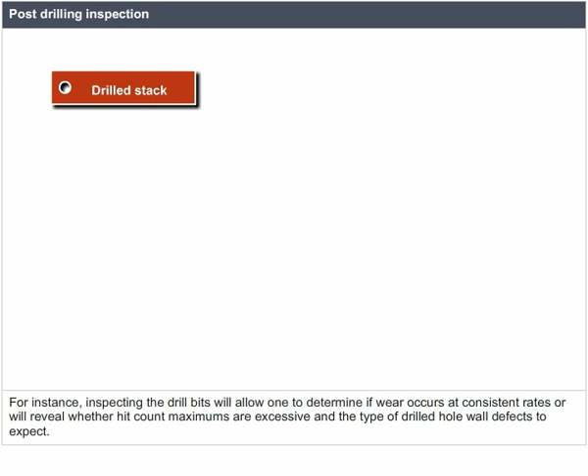Post-drilling inspection. A wealth of information is available by simply examining the materials from the drilled stack and the drill bits. For instance, inspecting the drill bits allows one to determine if wear occurs at consistent rates, or reveal whether hit count maximums are excessive, and the type of drill hole wall defects to expect.

Bonded debris and/or extensive wear to the drill corners imply high drilling temperatures or materials that are not fully cured, and point to a problem with the materials, or may suggest an excessive surface speed.

Extensive primary cutting edge wear indicates abrasive materials and may require lowering stack heights, reducing hit counts, or replacing entry or backup materials.

Post-drilling inspection continued. Burrs on the surfaces within the stack mean that there is a problem with the way panels are assembled and pinned, or it may be the result of warped panels.

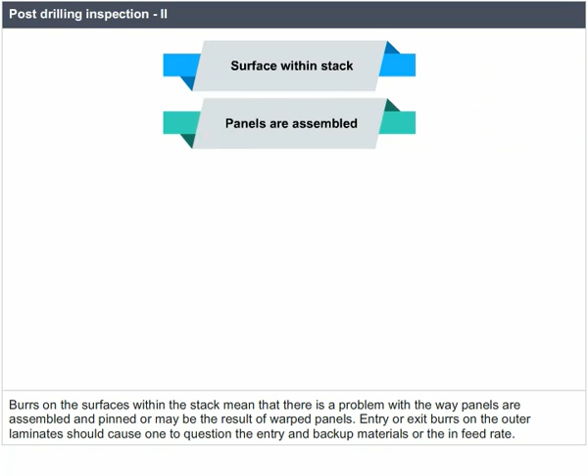Entry or exit burrs on the outer laminates should cause one to question the entry or backup materials or the in-feed rate. The point of the post-drilling inspection process is that if one takes time on a regular basis to examine materials and drill bits after drilling, many drilling problems would be solved before they get out of hand.

Soldering. Soldering is a process in which two or more metal items are joined together by melting and flowing a filler metal, solder, into the joint. The filler metals have a lower melting point than the adjoining metal.

Soldering differs from welding in that soldering does not involve melting the workpieces. In brazing, the filler metal melts at a higher temperature, but the workpiece metal does not melt. In the past, nearly all solders contained lead, but environmental concerns have increasingly dictated use of lead-free alloys for electronics and plumbing purposes.

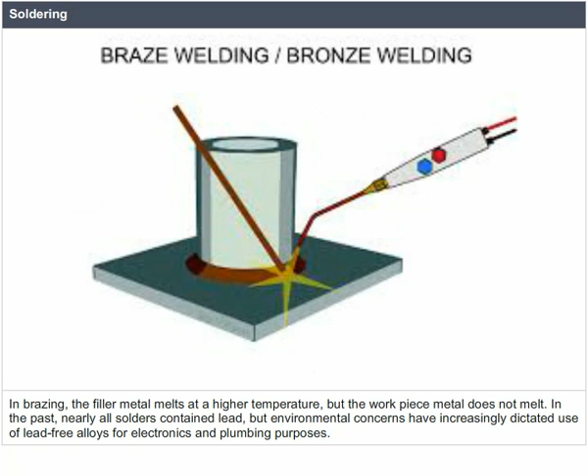Applications. Soldering is used in plumbing, electronics, and metalworking, from flashing to jewelry. Soldering provides reasonably permanent but reversible connections between copper pipes in plumbing systems, as well as joints in sheet metal objects such as food cans, roof flashing, rain gutters, and automobile radiators.

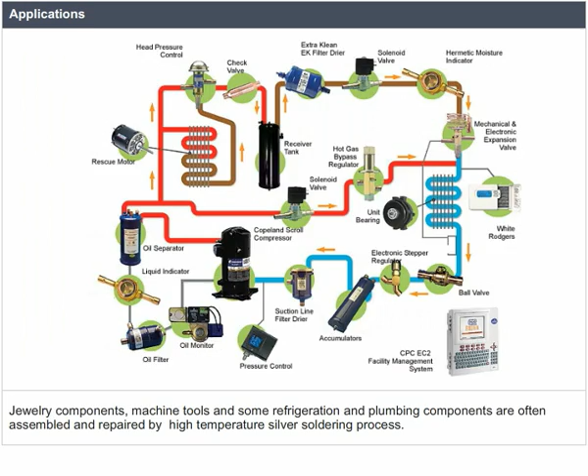Jewelry components, machine tools, and some refrigeration and plumbing components are often assembled and repaired by the high-temperature silver soldering process. Small mechanical parts are often soldered or brazed as well. Soldering is also used to join lead came and copper foil in stained glass work. It can also be used as a semi-permanent patch for a leak in a container or cooking vessel. Electronic soldering connects electrical wiring and electronic components to printed circuit boards, PCBs.

Types of solders. Most of the solder metals are alloys of tin and lead. These alloys exhibit a wide range of melting points, so different types of soldering metal can be used for a variety of applications. The percentage of lead is kept low due to its toxic properties.

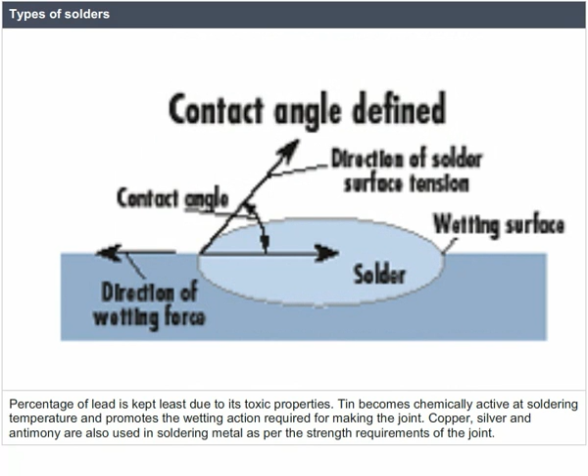Tin becomes chemically active at soldering temperature and promotes a wetting action required for making the joint. Copper, silver, and antimony are also used in soldering metal as per the strength requirements of the joint. Different solder metals have different melting points and varying applications.

Types of solders continued. A solder is selected on the basis of its melting point. If the metals to be joined have a high melting point, solder of high melting point is generally selected, as it provides better strength of the joint.

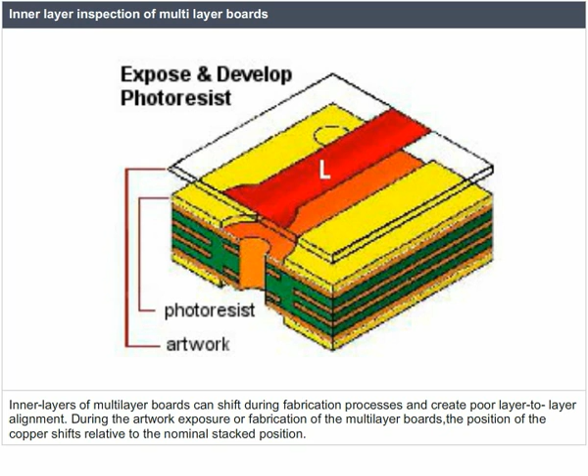Inner layer inspection of multi-layer boards. Inner layers of multi-layer boards can shift during fabrication processes and create poor layer-to-layer alignment. During the artwork exposure or fabrication of the multi-layer boards, the position of the copper shifts relative to the nominal stacked position.

This can create breakout or missing of the copper pads when drilling the interconnection holes. Two methods of inspecting the inner layers of multi-layer panels exist. One that has been used for several years is X-ray. This technology has progressed significantly and is widely used.

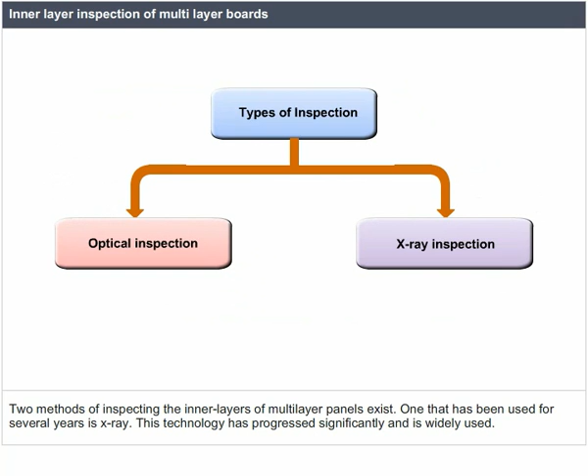X-ray technology is used to inspect the inner layers of multi-layer PCBs and to verify that the drill pads are located properly. Inner layer shift is identified easily in an X-ray image, and a simple technique can be used to measure the misalignment accurately.

In developing the PCB artwork, a set of stacked pads are located in the coupon area. These are inspected and a best fit centering is calculated.

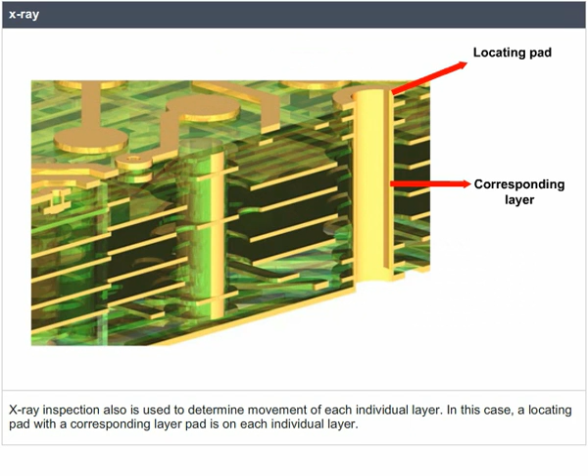X-ray inspection is also used to determine movement of each individual layer. In this case, a locating pad with a corresponding layer pad is on each individual layer. The system can measure the distance from the locating pad to a layer pad and determine the movement of each layer due to the location of the layer pads.

PCBs can be inspected after tooling holes are drilled to verify that they are in the proper locations. In addition, X-ray inspection can be performed after final drilling to verify that the holes are centered within the pads.

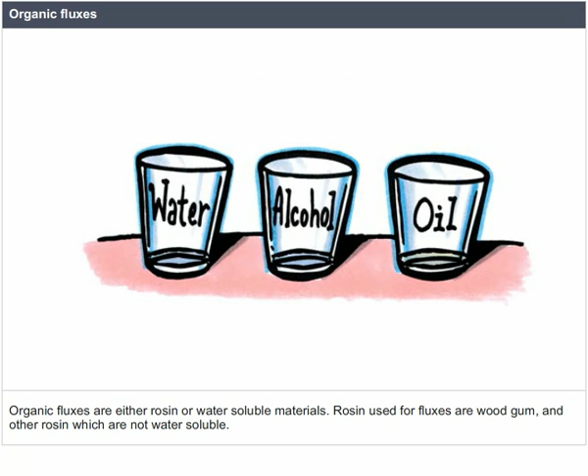Types of soldering fluxes. Soldering fluxes can be classified as organic and inorganic fluxes. Organic fluxes. Organic fluxes are either rosin or water-soluble materials. Rosin used for fluxes are wood gum and other rosin which are not water-soluble. Organic fluxes are mostly used for electrical and electronic circuit making. These are chemically unstable at elevated temperature but non-corrosive at room temperature.

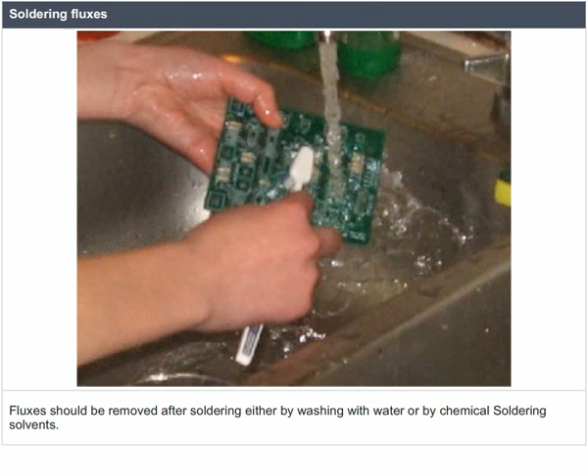Inorganic fluxes. Inorganic fluxes consist of inorganic acids, mixture of metal chlorides. These are used to achieve rapid and active fluxing where formation of oxide films is a problem. Soldering fluxes. Fluxes should be removed after soldering either by washing with water or by chemical soldering solvents.

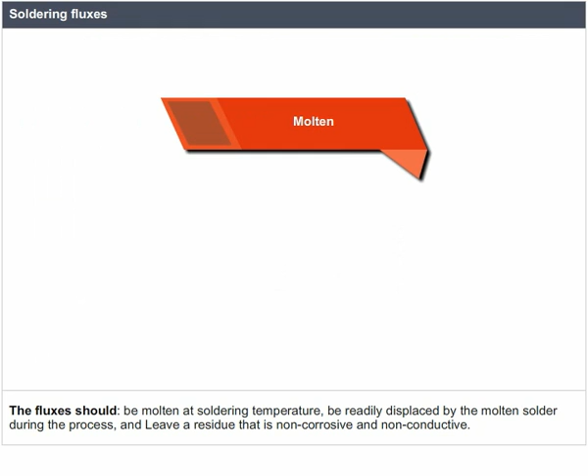The main functions performed by fluxes are remove oxide films and tarnish from base part surfaces, prevent oxidation during heating, and promote wetting of the faying surfaces. The fluxes should be molten at soldering temperature, be readily displaced by the molten solder during the process, and leave a residue that is non-corrosive and non-conductive.

Soldering process. There are three forms of soldering, each requiring progressively higher temperatures and producing an increasingly stronger joint strength. Soft soldering, which originally used a tin lead alloy as a filler metal. Silver soldering, which uses an alloy containing silver. Brazing, which uses brass alloy for the filler. The alloy of the filler metal for each type of soldering can be adjusted to modify the melting temperature of the filler.

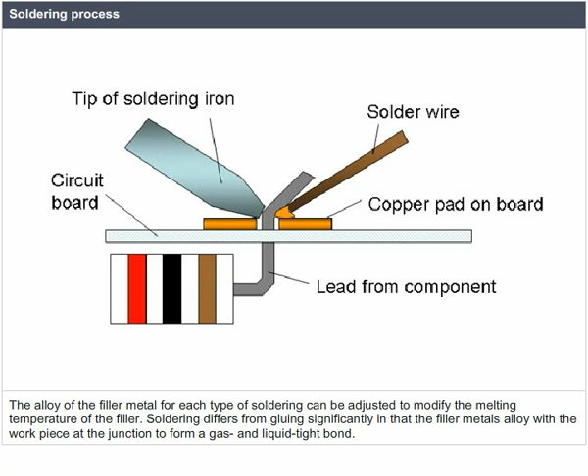Soldering differs from gluing significantly in that the filler metals alloy with the workpiece at the junction to form a gas and liquid tight bond. Soft soldering is characterized by having a melting point of the filler metal below approximately 400 degrees Celsius or 750 degrees Fahrenheit, whereas silver soldering and brazing use higher temperatures, typically requiring a flame or carbon arc torch to achieve the melting of the filler.

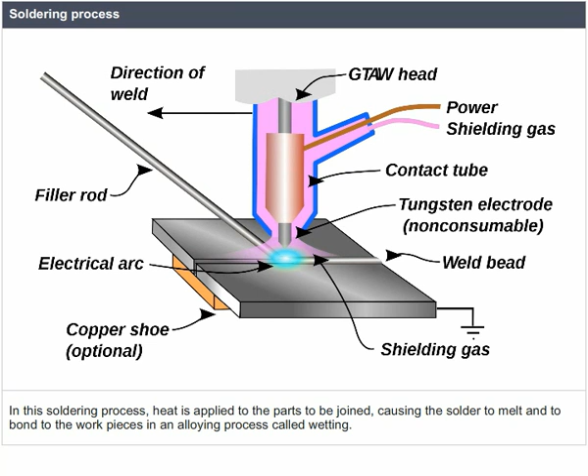Soft solder filler metals are typically alloys that have liquidus temperatures below 350 degrees Celsius. In this soldering process, heat is applied to the parts to be joined, causing the solder to melt and to bond to the workpieces in an alloying process called wetting. In stranded wire, the solder is drawn up into the wire by capillary action in a process called wicking. Capillary action also takes place when the workpieces are very close together or touching.

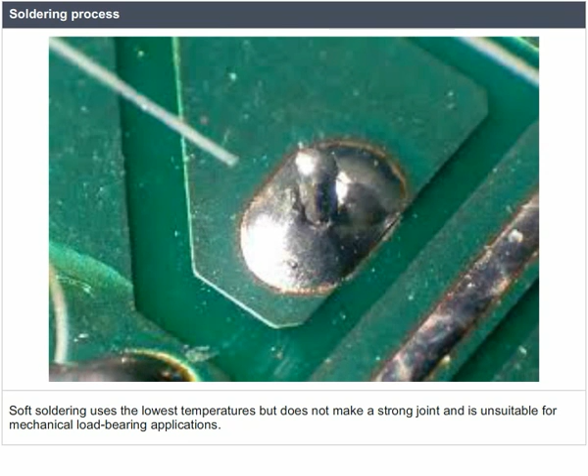The joint's tensile strength is dependent on the filler metal used. Soldering produces electrically conductive, water and gas-tight joints. Each type of solder offers advantages and disadvantages. Soft solder is so called because of the soft lead that is primarily its ingredient. Soft soldering uses the lowest temperatures but does not make a strong joint and is unsuitable for mechanical load-bearing applications. It is also unsuitable for high-temperature applications as it softens and melts.

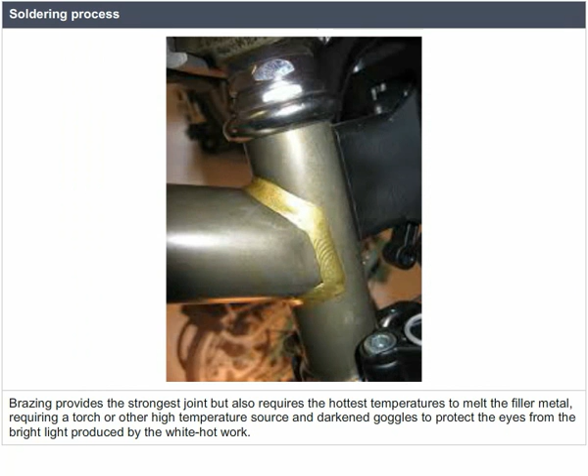Silver soldering, as used by jewelers, machinists, and in some plumbing applications, requires the use of a torch or other high-temperature source and is much stronger than soft soldering. Brazing provides the strongest joint but also requires the hottest temperatures to melt the filler metal, requiring a torch or other high-temperature source and darkened goggles to protect the eyes from the bright light produced by the white-hot work. It is often used to repair cast-iron objects, wrought iron furniture, etc.

Soldering operations can be performed with hand tools, one joint at a time, or on a production line. Hand soldering is typically performed with a soldering iron, soldering gun or a torch, or occasionally a hot air pencil. Sheet metal work was traditionally done with soldering coppers directly heated by a flame, with sufficient stored heat in the mass of the soldering copper to complete a joint. Torches or electrically heated soldering irons are more convenient.

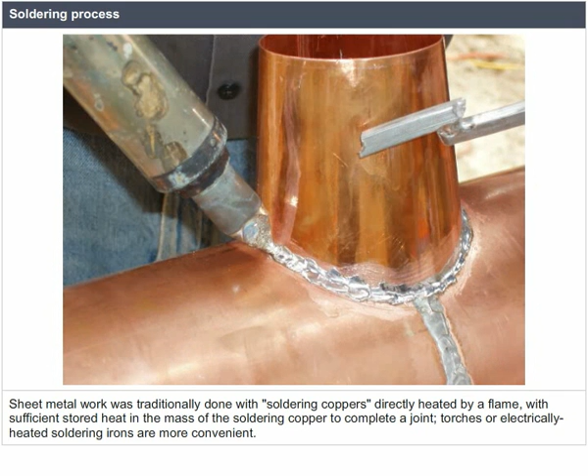All soldered joints require the same elements of cleaning of the metal parts to be joined, fitting up the joint, heating the parts, applying flux, applying the filler, removing heat and holding the assembly still until the filler metal has completely solidified. Depending on the nature of flux material used, cleaning of the joints may be required after they have cooled. Each alloy has characteristics that work best for certain applications, notably strength and conductivity, and each type of solder and alloy has different melting temperatures.

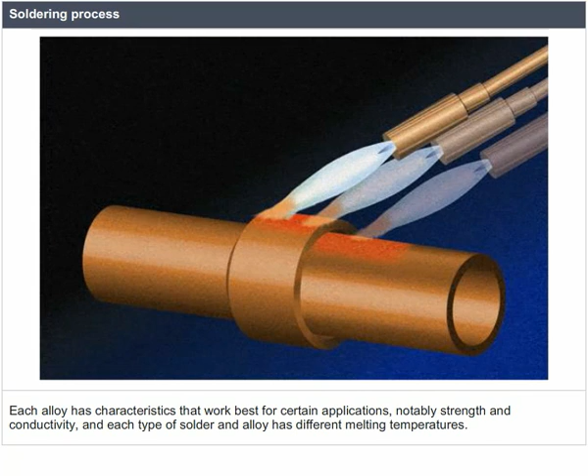The term silver solder likewise denotes the type of solder that is used. Some soft solders are silver-bearing alloys used to solder silver-plated items. Lead-based solders should not be used on precious metals because the lead dissolves the metal and disfigures it.

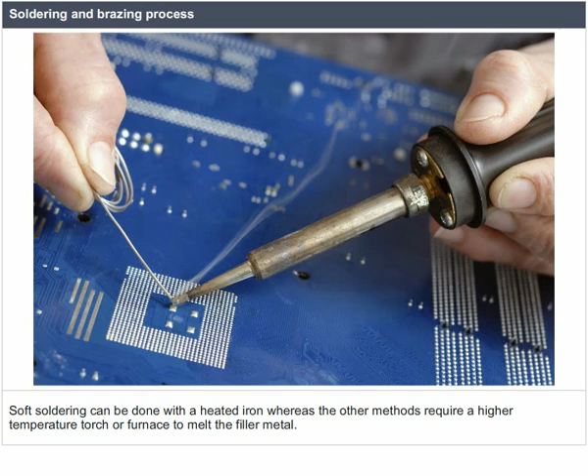Soldering and brazing process. The distinction between soldering and brazing is based on the melting temperature of the filler alloy. A temperature of 450 degrees Celsius is usually used as a practical delineating point between soldering and brazing. Soft soldering can be done with a heated iron, whereas the other methods require a high-temperature torch or furnace to melt the filler metal. Different equipment is usually required since the soldering iron cannot achieve high enough temperatures for hard soldering or brazing.

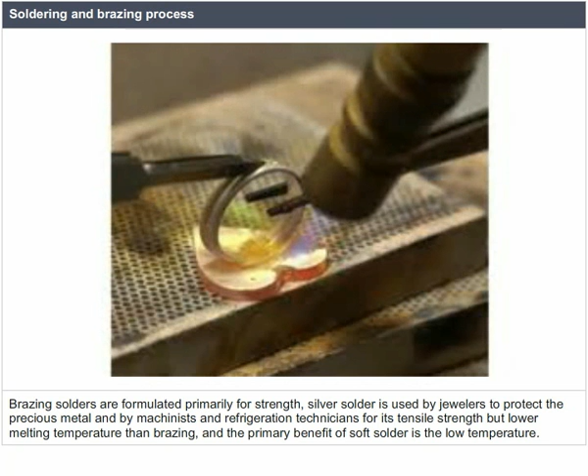Brazing filler metal is stronger than silver solder, which is stronger than lead-based soft solder. Brazing solders are formulated primarily for strength. Silver solder is used by jewelers to protect the precious metal and by machinists and refrigeration technicians for its tensile strength but lower melting temperature than brazing, and the primary benefit of soft solder is a low temperature.

Since the joint is produced using a metal with a lower melting temperature than the workpiece, the joint will weaken as the ambient temperature approaches the melting point of the filler metal. For that reason, the higher temperature processes produce joints which are effective at high temperatures. Braze connections can be as strong or nearly as strong as the parts they connect, even at elevated temperatures.

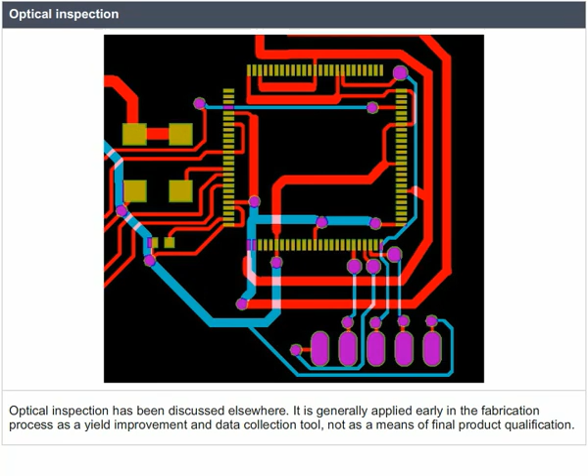Optical inspection. Optical inspection has been discussed elsewhere. It is generally applied early in the fabrication process as a yield improvement and data collection tool, not as a means of final product qualification. However, with improvements in resolution, the type of defects that may escape undetected becomes somewhat more limited, and optical inspection is argued as a possible means of final testing.

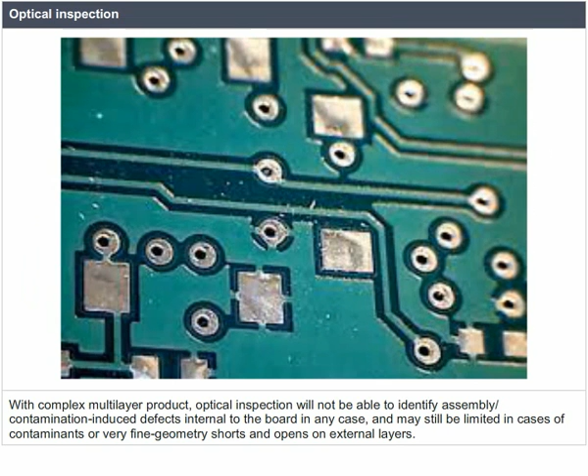With complex multi-layer product, optical inspection will not be able to identify assembly, contamination-induced defects internal to the board in any case, and may still be limited in cases of contaminants or very fine geometry shorts and opens on external layers. The equipment is somewhat slower than universal grid test systems, particularly when run at very high resolution.

For such reasons, it is still not common practice to employ optical inspection by itself as a substitute for electrical testing. This may be a method that develops further in the future or that finds acceptance in special circumstances.

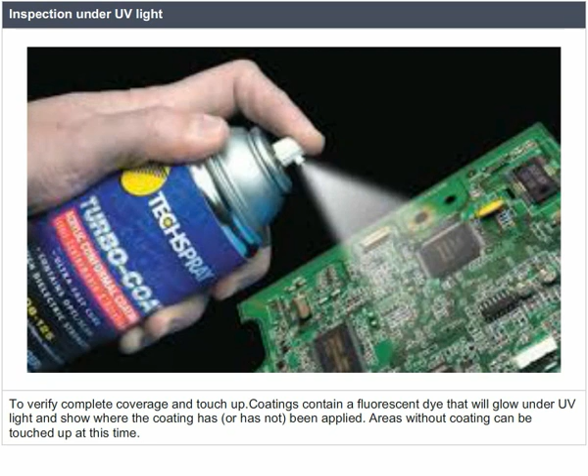Inspection under UV light. To verify complete coverage and touch-up, coatings contain a fluorescent dye that will glow under UV light and show where the coating has or has not been applied. Areas without coating can be touched up at this time. The areas most susceptible to insufficient coating are corners of parts where the coating can flow away and leave little behind, the protruding ends of through-hole part leads, and the shadowed areas under or behind larger components.

If large flat areas are uncoated and show beads of coating, there is a wetting problem due to improper surface preparation or a material incompatibility. Inspection under UV light continued. The coating should also be inspected for improper thickness, bubbles, trapped material, or debris, and incomplete curing.

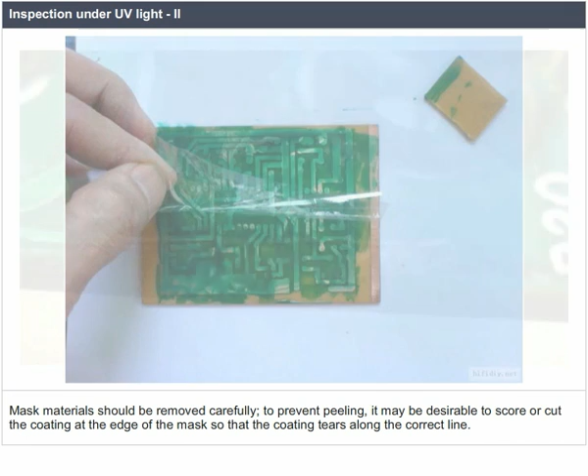Mask material should be removed carefully. To prevent peeling, it may be desirable to score or cut the coating at the edge of the mask so that the coating tears along the correct line. Ensure that the mask is removed entirely and that no residue has been left behind on the board. Latex mask that has been overheated will be sticky and difficult to remove completely, as will overheated masking tapes.

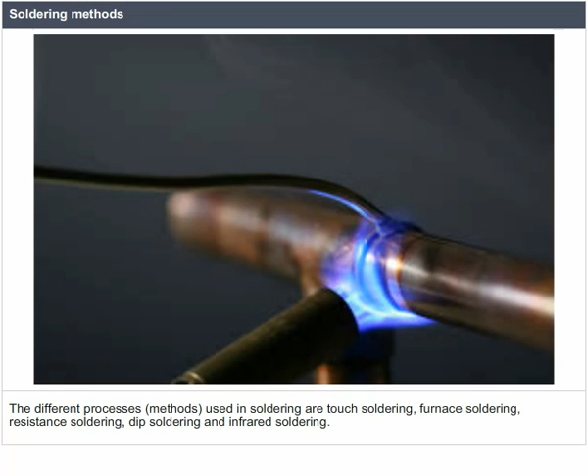Soldering methods. There is a lot of similarity between soldering processes. The different processes or methods used in soldering are touch soldering, furnace soldering, resistance soldering, dip soldering, and infrared soldering. These may apply to hand soldering, wave soldering, and reflow soldering. Hand soldering. Hand soldering is done manually using a soldering iron. Small joints are made this way in a very short duration of approximately 1 second.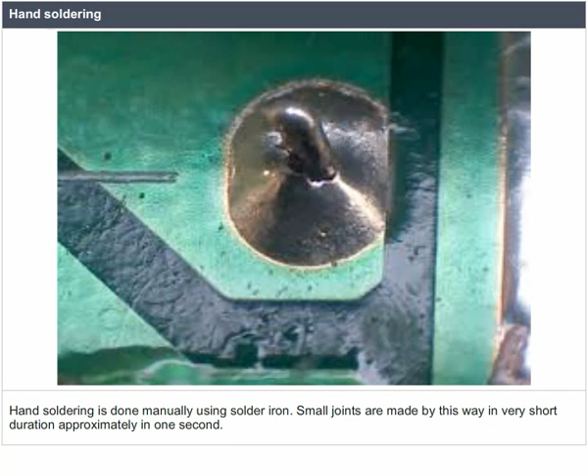Wave soldering. Wave soldering is a mechanized technique that allows multiple lead wires to be soldered to a printed circuit board as it passes over a wave of molten solder. In this process, a PCB on which electronic components have been placed with their lead wires extending through the holes in the board is loaded onto a conveyor for transport through the wave soldering equipment. The conveyor supports a PCB on its sides, so its underside is exposed to the processing steps, which consist of the following.

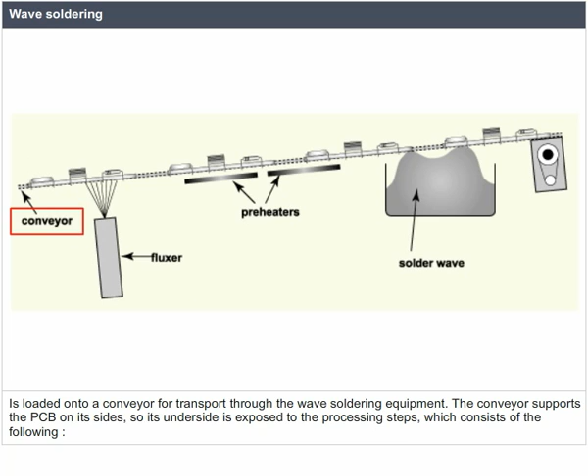Flux is applied through foaming, spraying, or brushing, and wave soldering is used to pump liquid solder from a molten bath onto the bottom of the board to make soldering connections between lead wire and metal circuit on the board. Reflow soldering. This process is also widely used in electronics to assemble surface mount components to printed circuit boards.

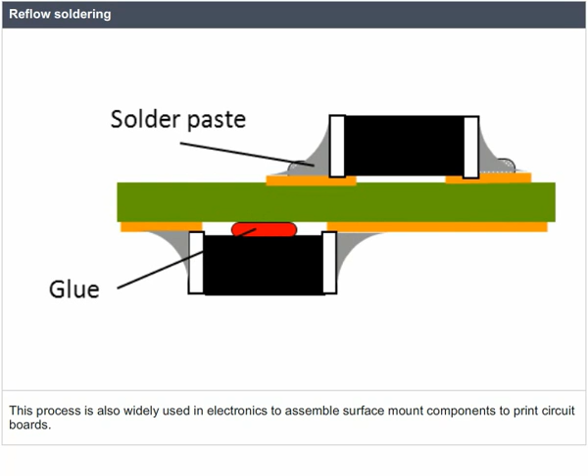In this process, a solder paste consisting of solder powders in a flux binder is applied to spots on the board where electrical contacts are to be made between surface mount components and the copper circuit. The components are placed on the paste spots and the board is heated to melt the solder, forming mechanical and electrical bonds between the component leads and the copper on the circuit boards.

Inspection and testing. There are various types: connector inspection, PCA inspection, solder sliver inspection, electrical testing, and tool check. Connector inspection. Check the connector after pressing for even bottom side pin protrusion, top side connector body seating height, damage to the connector body, inaccurate mating pin positions within the connector as opposed to within the board, damage or movement of electrical shields if the connector is so equipped.

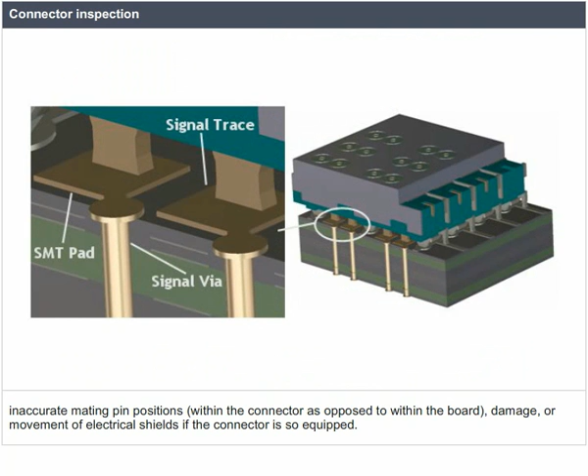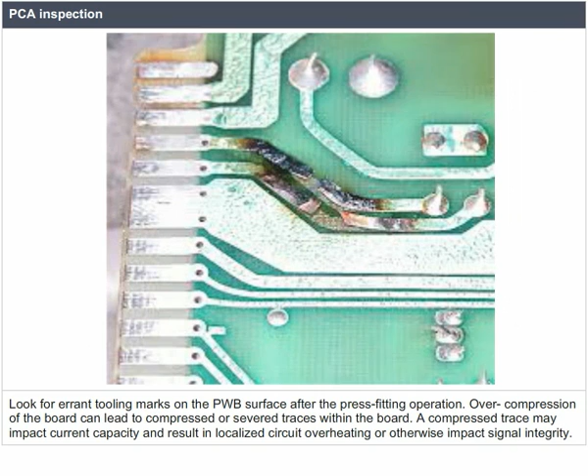PCA inspection. Check the PCA for surface damage in the area of the pressing operation. A mispositioned or damaged press tool or board support can damage components or overly compress the laminate, causing outer or inner layer trace damage. Look for errant tooling marks on the PWB surface after the press fitting operation. Overcompression of the board can lead to compressed or severed traces within the board. A compressed trace may impact current capacity and result in localized circuit overheating or otherwise impact signal integrity.

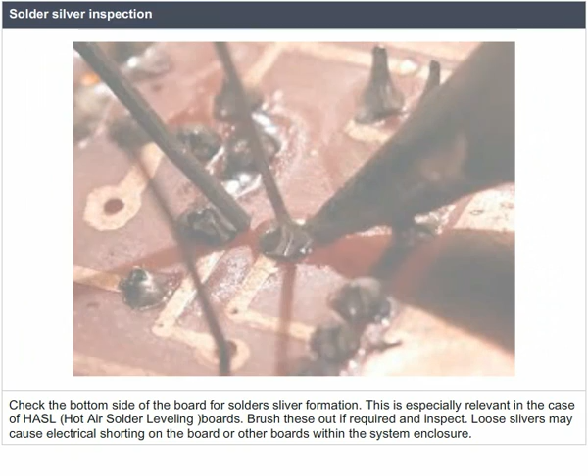Solder sliver inspection. Check the bottom side of the board for solder sliver formation. This is especially relevant in the case of HASL, hot air solder leveling boards. Brush these out if required and inspect. Loose slivers may cause electrical shorting on the board or other boards within the system enclosure. Work with the PWB vendor to ensure that drilled and plated holes are sized appropriately for the press fit process and that excess solder from the HASL process does not adversely alter the finished hole size or shape.

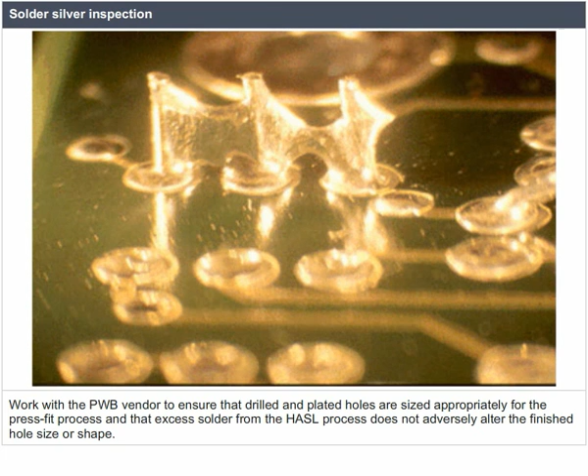Electrical testing. In the case of high-friction surface finishes, such as OSP, Organic Solderability Preservative, copper, forces applied during the press-fit process may be so great as to cause damage to the PTH, plated through-hole barrel, or adjacent inner or outer layer circuit traces. Check the board visually and by electrical test as part of the first article inspection. Check tooling frequently. Check for excessive tool wear or damage. A damaged tool can ruin a connector or PWB and replicate the damage over many boards.

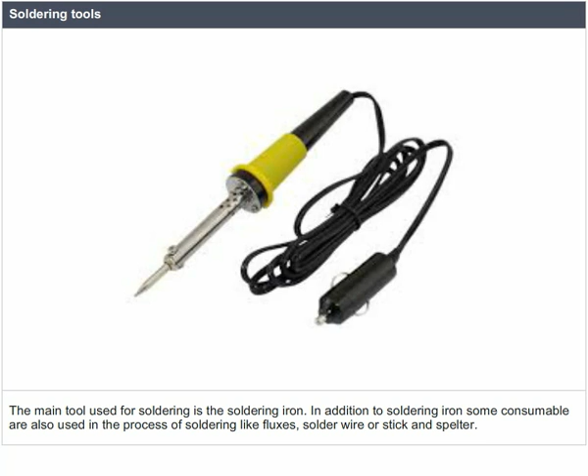Soldering tools. The main tool used for soldering is a soldering iron. In addition to the soldering iron, some consumables are also used in the process of soldering, like fluxes, solder wire or stick, and spelter. Soldering iron. It consists of a copper bit attached to an iron rod at one end and a wooden handle at the other. It is used to melt the filler metal and paste it to make the joint.

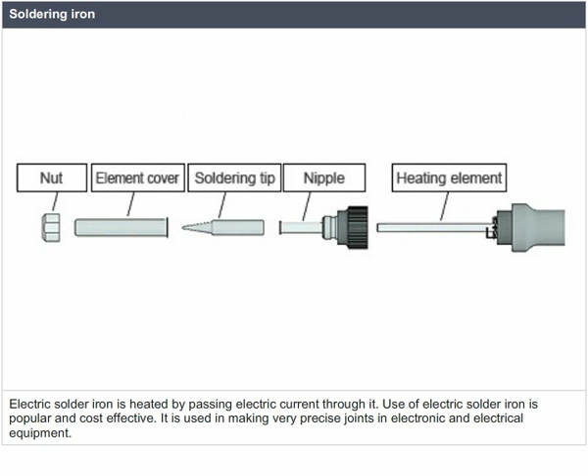A soldering iron can be a forged soldering iron, which is heated in a furnace to have sufficient temperature to melt the filler metal, or it can be an electric soldering iron. An electric soldering iron is heated by passing electric current through it. Use of the electric soldering iron is popular and cost-effective. It is used in making very precise joints in electronic and electrical equipment.

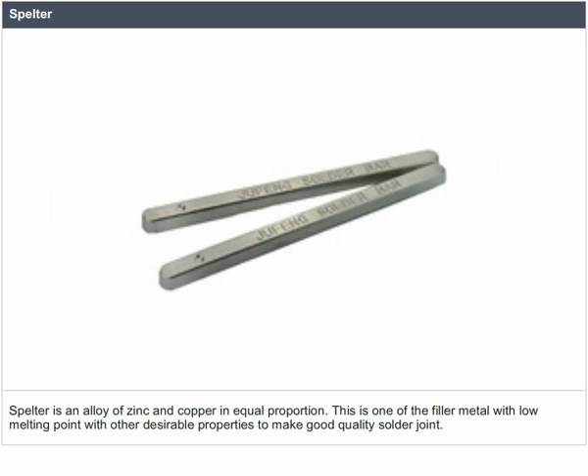Spelter. Spelter is an alloy of zinc and copper in equal proportion. This is one of the filler metals with low melting point with other desirable properties to make a good quality solder joint. Different types of solders and fluxes, which are common consumables used in soldering, have already been described. Some precautions are to be followed to keep the soldering tools as described.

Selection of the correct tool according to the process. A defective tool should not be used. An electrically heated soldering iron should have proper earthing. A hot soldering iron, when idle, should be placed on its proper stand. The tip of the soldering iron should be cleaned before its use. The soldering iron should be gripped at its handle while in use.

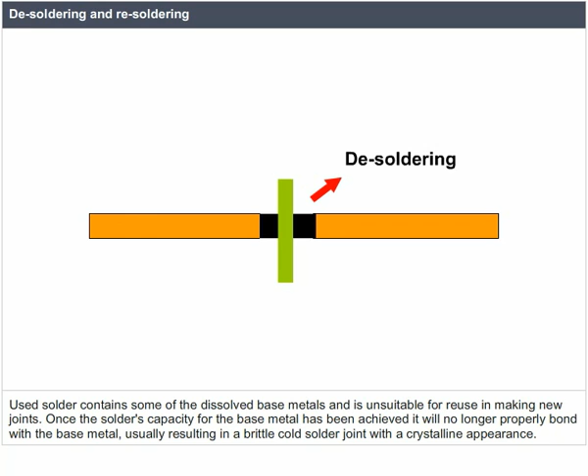Desoldering and resoldering. Used solder contains some of the dissolved base metals and is unsuitable for reuse in making new joints. Once the solder's capacity for the base metal has been achieved, it will no longer properly bond with the base metal, usually resulting in a brittle, cold solder joint with a crystalline appearance. It is good practice to remove solder from a joint prior to resoldering. Desoldering braids or vacuum desoldering equipment, solder suckers, can be used.

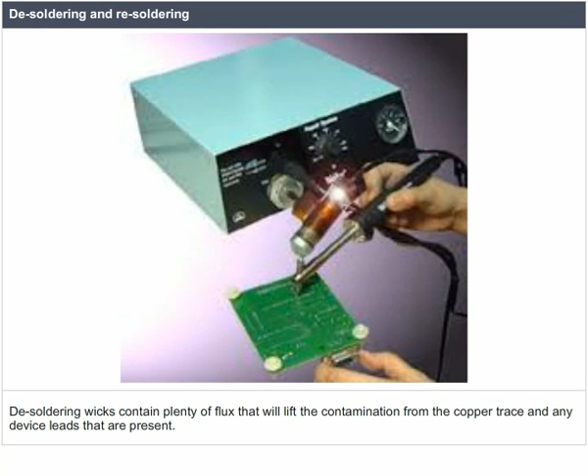Desoldering wicks contain plenty of flux that will lift the contamination from the copper trace and any device leads that are present. This will leave a bright, shiny, clean junction to be resoldered. The lower melting point of solder means it can be melted away from the base metal, leaving it mostly intact, though the outer layer will be tinned with solder.

Flux will remain, which can easily be removed by abrasive or chemical processes. This tinned layer will allow solder to flow into a new joint, making the new solder flow very quickly and easily.

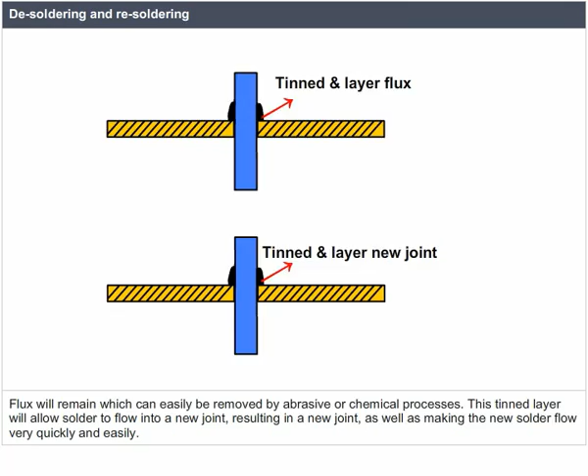Lead-free electronic defects. More recently, environmental legislation has specifically targeted the wide use of lead in the electronics industry. The RoHS Restriction of Hazardous Substances directive in Europe requires many new electronic circuit boards to be lead-free by 1st July 2006, mostly in the consumer goods industry, but in some others as well.

In Japan, lead was phased out prior to legislation by manufacturers due to the additional expense in recycling products containing lead. However, even without the presence of lead, soldering can release fumes that are harmful and toxic to humans. It is highly recommended to use a device that can remove the fumes from the work area, either by ventilating outside or filtering the air.

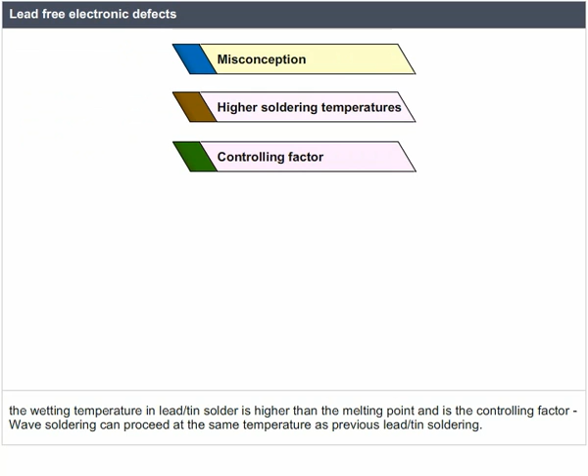It is a common misconception that lead-free soldering requires higher soldering temperatures than lead-tin solder. The wetting temperature in lead-tin solder is higher than the melting point and is a controlling factor. Wave soldering can proceed at the same temperature as previous lead-tin soldering. Nevertheless, many new technical challenges have arisen with this new endeavor.

To reduce the melting point of tin-based solder alloys, various new alloys have to be researched with additives of copper, silver, and bismuth as typical minor additives to reduce melting point and control other properties. Additionally, tin is a more corrosive metal and can eventually lead to the failure of solder baths, etc.

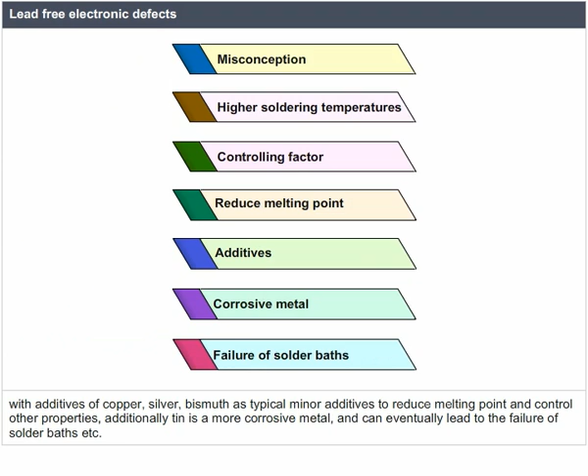Lead-free construction has also extended to components, pins, and connectors. Most of these pins use copper frames and either lead, tin, gold, or other finishes. Tin finishes are the most popular of lead-free finishes. Nevertheless, this brings up the issue of how to deal with tin whiskers. The current movement brings the electronic industry back to the problem solved in the 1960s by adding lead.

JEDEC has created a classification system to help lead-free electronic manufacturers decide what provisions to take against whiskers, depending upon their application. Soldering defects.

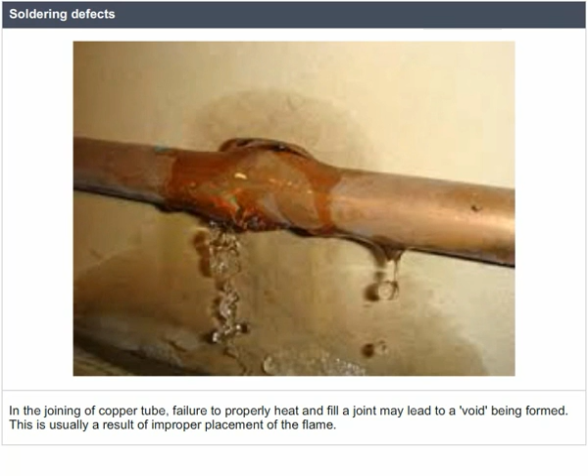In the joining of copper tube, failure to properly heat and fill a joint may lead to a void being formed. This is usually a result of improper placement of the flame. If the heat of the flame is not directed at the back of the fitting cup, and the solder wire is applied at a 180 degree angle opposite the flame, then solder will quickly fill the opening of the fitting, trapping some flux inside the joint. This bubble of trapped flux is a void, an area inside a soldered joint where solder is

unable to completely fill the fitting's cup because flux has become sealed inside the joint, preventing solder from occupying that space.

Soldering procedure. The following sequential steps should be carried out as soldering procedure. Workpieces which are to be joined together should be perfectly clean. There should not be any dirt, dust, rust, paint, or grease. This is so that the solder or spelter can stick to the joint with proper strength.

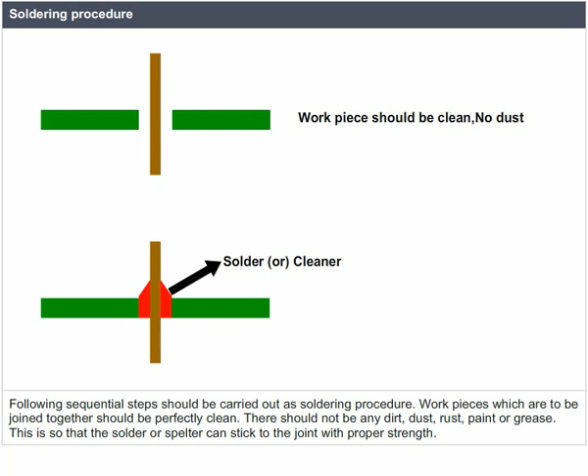Cleaning is done with the help of a file or sandpaper. In case of joining of conducting wires, insulation of the portion to be joined should be perfectly removed. Sometimes chemicals are used to clean the workpieces. Descaling is done by dipping the workpieces in dilute hydrochloric acid.

Soldering procedures continued. Preparation of joint. After cleaning, workpieces should be kept together in the correct position to make the final joint. Workpieces should be clamped to avoid any relative movement between them that may disturb the joint making.

At the joint, small grooves are made on the workpieces to facilitate better flow of molten solder and so good strength of the joint.

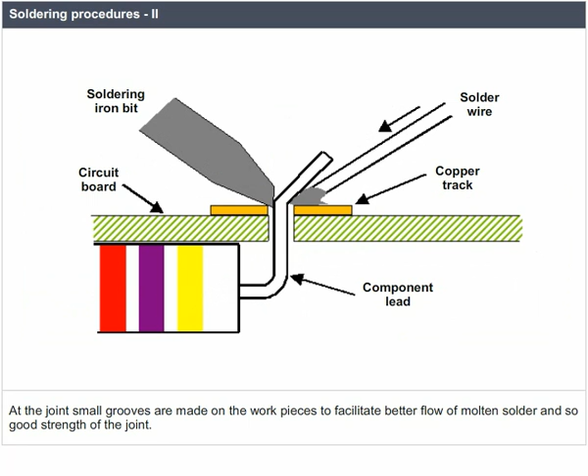There are two objectives of a joint: to bear load and to make electrical contact. In case of load-bearing joints, lap joint or butt joints are preferred. It is important to note that the strength of a soldered joint cannot be compared with a welded joint.

If electrical contact is to be made, the solder should be so selected that the resistance of the joint should match with the resistance of the conductor.

Fluxing. Fluxing includes selection of appropriate flux and its application to the joint. Selection of flux depends on the material of the workpiece, keeping its purpose in view. It is applied to the joint with the help of a soldering brush before soldering. It avoids oxidation of molten metal, helps in flow of molten solder into the joint, and so maintains strength of the joint.

Inspection categories. There are 4 types of inspection categories. They are material inspection, qualification inspection, quality conformance inspection, and reliability testing.

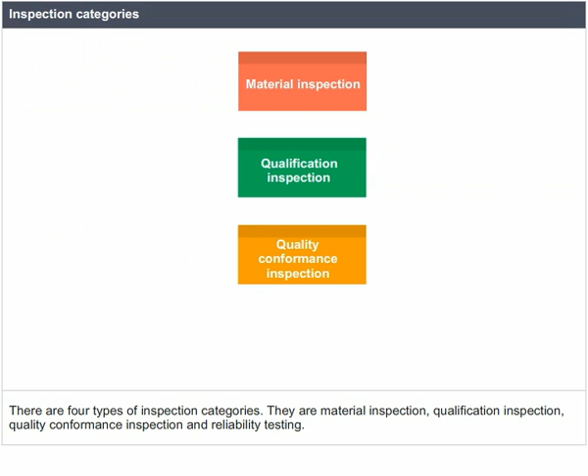Material inspection. This inspection usually consists of certifications from the material supplier, supported by data from the supplier's own inspections. The materials used must be inspected by the PCB manufacturer to ensure compliance with customer requirements.

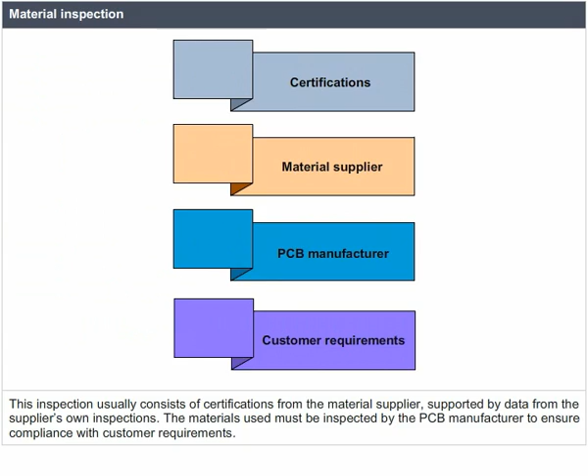Qualification inspection: the PCB supplier must provide proof to the user of its qualifications to build the product specified. The user must then review this proof in order to minimize the risk associated with buying from the PCB manufacturer. This process usually includes a PCB manufacturer supplying a self-declaration of capability such as those found in IPC 1710, and then supplying some kind of physical sample or testing data to support the assertions made in the self-declaration. It is up to the PCB user to determine the level and detail of qualification required.

Quality conformance inspection: these product verification inspections use specified acceptability criteria and are performed prior to shipment of PCBs to customers. These inspections can be defined either by industry or customer standards, or by a combination of both.

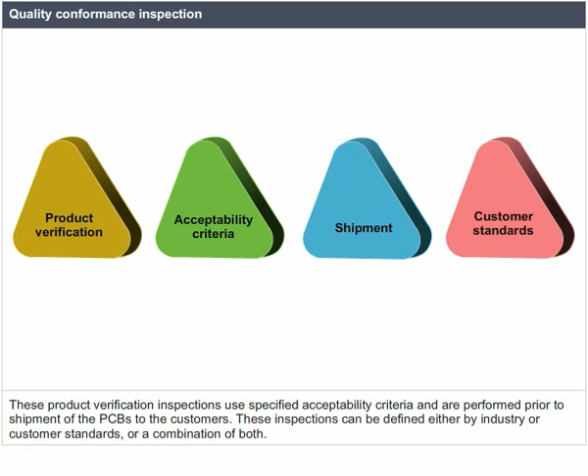Reliability testing: this testing consists of looking for imperfections in the PCB that may show up at some time during the product's field life. They include accelerated life testing for both the interconnection and insulation attributes of the PCB.

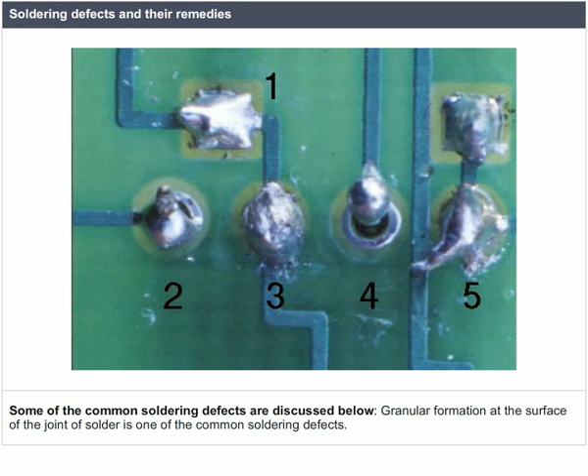Soldering defects and their remedies. Some of the common soldering defects are discussed below. Granular formation at the surface of the solder joint is one of the common soldering defects. Formation of spheroids at the surface of the soldering joint is also a similar defect. This happens due to underheating or overheating of the soldering iron, or insufficient use of flux. Formation of spheroids makes the joint ugly and weak in strength.

Improper or uneven application of flux may make the joint weak in strength. Proper coordination between flux application and soldering makes the joint of good quality.

Safety precautions in soldering: keep the soldering iron always on its stand. All electrically operated instruments and equipment should have proper earthing. Sometimes emission of smoke during the soldering operation may become poisonous due to a particular type of flux; operators should have protection from the same. Flux should be applied gradually while soldering.

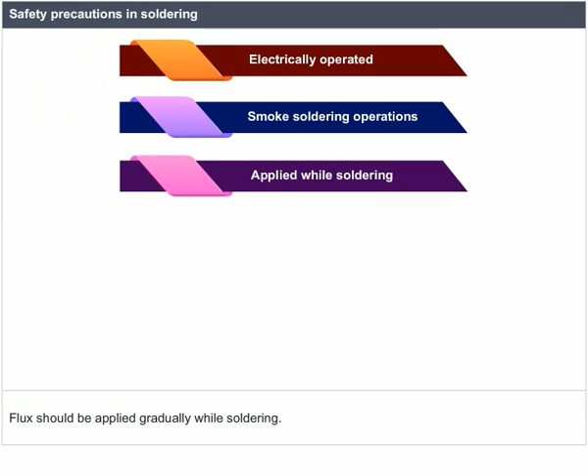While diluting HCl, water should not be added to HCl, but HCl should be mixed into the water drop by drop to avoid accidents. The workplace should have enough ventilation, and smoking should be strictly prohibited during the operation. The workplace should have the facility of first aid. It should be noted that good quality surface preparation always contributes to a good quality joint.

Electronics: various problems may arise in the soldering process which lead to joints that are non-functional, either immediately or after a period of use. The most common defect when hand soldering results from the parts being joined not exceeding the solder's liquidus temperature, resulting in a cold solder joint. This is usually the result of the soldering iron being used to heat the solder directly rather than the parts themselves. Properly done, the iron heats the parts to be connected, which in turn melts the solder, guaranteeing adequate heat in the joined parts for thorough wetting.

In electronic hand soldering, the flux is embedded in the solder. Therefore, heating the solder may cause the flux to evaporate before it cleans the surfaces being soldered. A cold solder joint may not conduct at all, or may conduct only intermittently. Cold solder joints also happen in mass production and are a common cause of equipment which passes testing but malfunctions after some years of operation.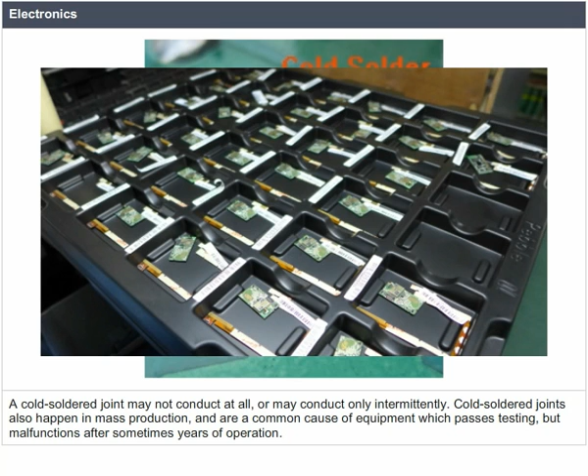A dry joint occurs when the cooling solder is moved, and often occurs because the joint moves when the soldering iron is removed from the joint.

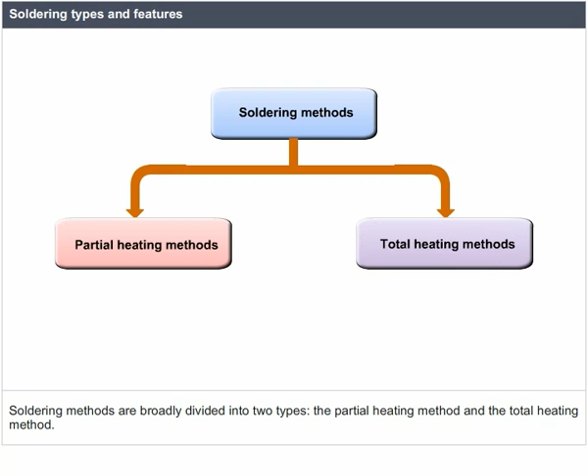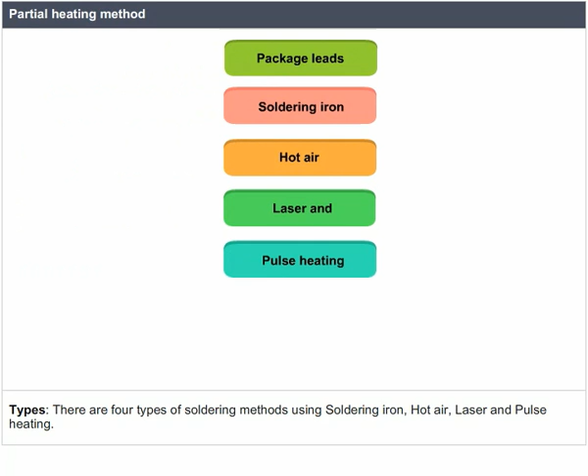Soldering types and features: soldering methods are broadly divided into two types, the partial heating method and the total heating method. Partial heating method: heat is applied to the package leads and/or PWB (printed wiring board) in a localized manner. Types: there are four types of soldering methods using this approach: soldering iron, hot air, laser, and pulse heating. Features: partial heating involves less heat stress on the device and printed wiring board, but is unsuitable for large volume production. Therefore, this method is mainly used to correct soldering or for devices with low heat resistance.

Total heating method: heat is applied to the entire package and/or PWB. Types: there are various types of soldering methods such as infrared reflow, convection reflow, infrared convection combined, VPS (vapor phase soldering), and flow wave soldering. Features: because of excellence in productivity and running cost, the total heating method is widely used. However, this method can place considerable heat stress on the semiconductor device and board.

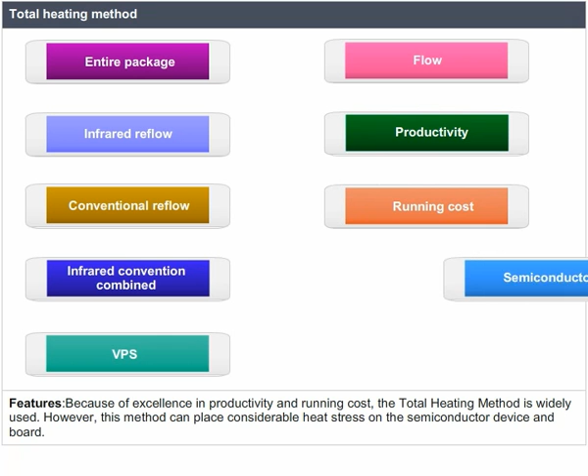Inspection criteria: when inspecting PCBs, the requirements can be separated into externally observable attributes and internally observable attributes. The actual requirements vary by specification, but the requirements stated generally follow IPC document guidelines.

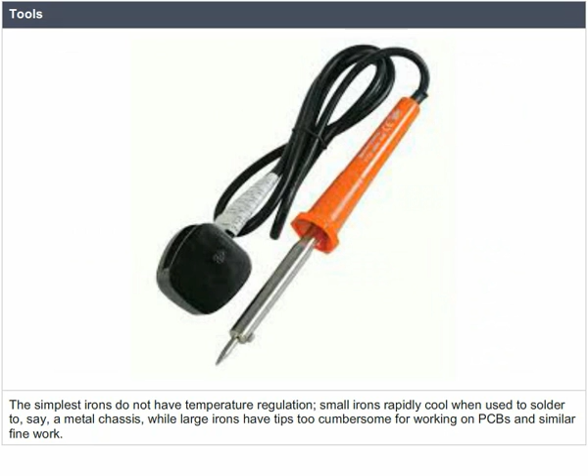Tools. Hand soldering tools widely used for electronic work include the electric soldering iron, which can be fitted with a variety of tips ranging from blunt to very fine, to chisel heads for hot cutting plastics rather than soldering. The simplest irons do not have temperature regulation. Small irons rapidly cool when used to solder, say, a metal chassis, while large irons have tips too cumbersome for working on PCBs and similar fine work.

Temperature control irons have a reserve of power and can maintain temperature over a wide range of work. The soldering gun heats faster but has a larger and heavier body. Gas-powered irons using a catalytic tip to heat a bit without flame are used for portable applications. Hot air guns and pencils allow rework of component packages which cannot easily be performed with electric irons and guns.

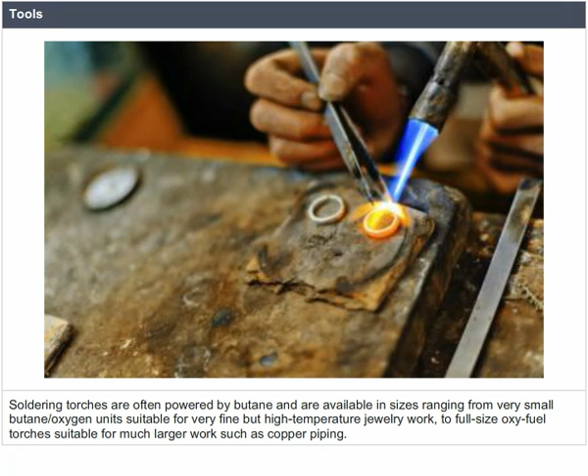For non-electronic applications, soldering torches use a flame rather than a soldering tip to heat solder. Soldering torches are often powered by butane and are available in sizes ranging from very small butane-oxygen units suitable for very fine but high-temperature jewelry work to full-size oxy-fuel torches suitable for much larger work such as copper piping. Common multi-purpose propane torches, the same kind used for heat stripping paint and thawing pipes, can be used for soldering pipes and other fairly large objects, either with or without a soldering tip attachment.

Pipes are generally soldered with a torch by directly applying the open flame. A soldering copper is a tool with a large copper head and a long handle, which is heated in a blacksmith's forge fire and is used to apply heat to sheet metal for soldering.

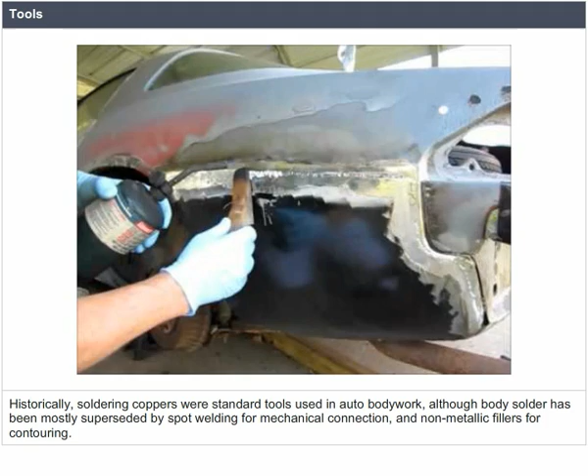Typical soldering coppers have heads weighing between 1 and 4 pounds. The head provides a large thermal mass to store enough heat for soldering large areas before needing reheating in the fire. The larger the head, the longer the working time. Historically, soldering coppers were standard tools used in auto bodywork, although body solder has been mostly superseded by spot welding for mechanical connection and non-metallic fillers for contouring.

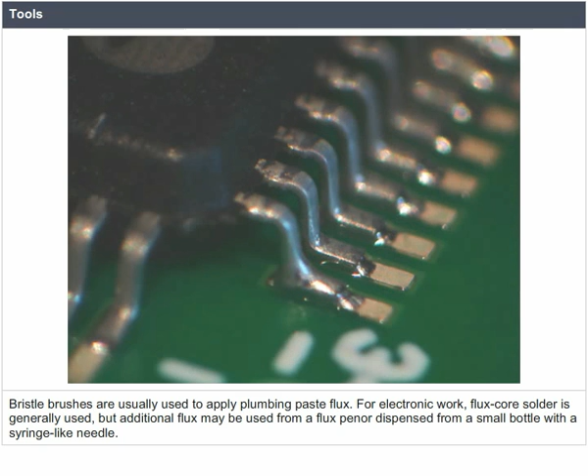Toaster ovens and handheld infrared lights have been used by hobbyists to replicate production soldering processes on a much smaller scale. Bristle brushes are usually used to apply plumbing paste flux. For electronic work, flux core solder is generally used, but additional flux may be used from a flux pen or dispensed from a small bottle with a syringe-like needle. Wire brush, wire wool, and emery cloth are commonly used to prepare plumbing joints for connection.

Electronic joints are usually made between surfaces that have been tinned and rarely require mechanical cleaning, though tarnished component leads and copper traces with a dark layer of oxide passivation, as on a new prototyping board that has been on the shelf for about a year or more, may need to be mechanically cleaned.

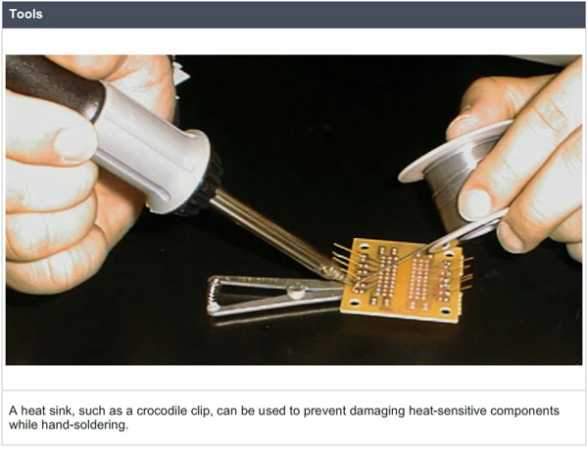A heat sink, such as a crocodile clip, can be used to prevent damaging heat-sensitive components while hand soldering. The heat sink limits the temperature of the component body by absorbing and dissipating heat, reducing the thermal resistance between the component and the air, while the thermal resistance of the leads maintains the temperature difference between the part of the leads being soldered and the component body, so that the leads become hot enough to melt the solder, while the component body remains cooler.

Reason for inspection. Manufacturers inspect printed circuit assemblies during production for a variety of reasons. Most of these reasons fall into the following categories: improvement of process defect coverage, improvement in ability to meet customer specifications, detection of process defects as quickly as possible after they occur, and ability to decrease process defect rates through statistical process control.

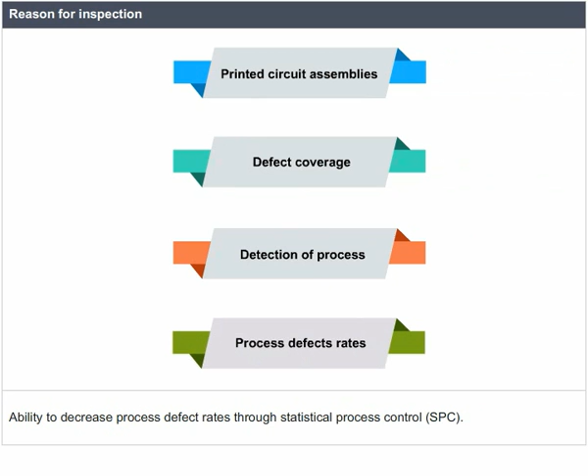Automated inspection. The automation of inspection has evolved into systems that resemble the automated test equipment used to make electrical measurements and find electrical defects. Automated inspection systems generate images of the item to be inspected, digitally analyze the image to locate and measure key features, and based on these measurements, automatically decide whether a defect exists or not.

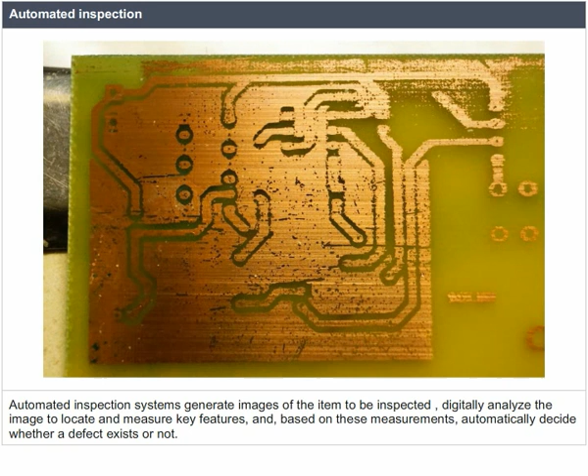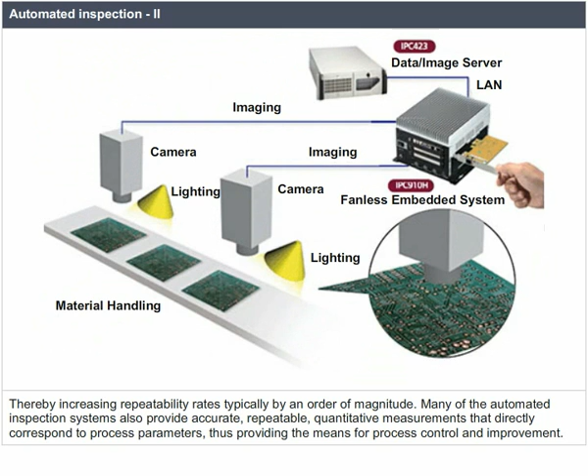Just like visual inspection, automated inspection systems do not require physical contact with the printed circuit assembly to generate the desired images. Unlike visual inspection, however, automated inspection removes human subjectivity from defect detection, thereby increasing repeatability rates, typically by an order of magnitude. Many of the automated inspection systems also provide accurate, repeatable, quantitative measurements that directly correspond to process parameters, thus providing the means for process control and improvement.

Conclusion. In this chapter, we have covered the following aspects of soldering techniques: inspection of populated PCB board.